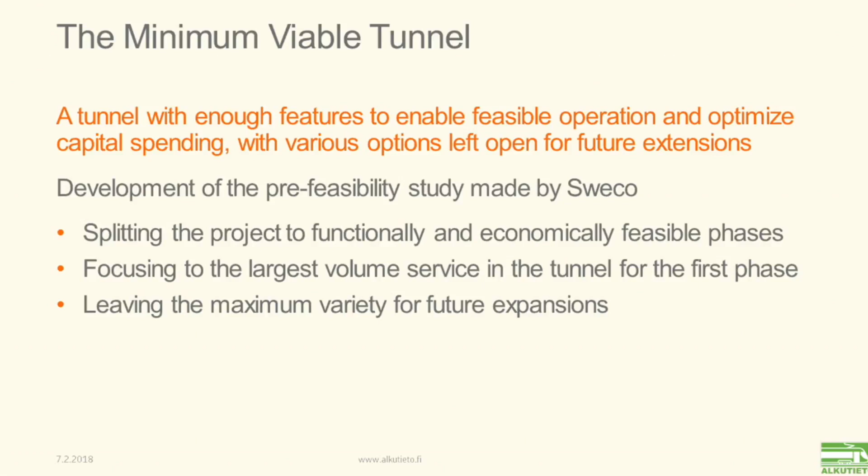And the work is very much based on the pre-feasibility study made by Sweco, because that was our background information given to us before the deadline of the competition works. We showed the final solutions and final results of the video in the morning, also only today. So that's not the background of our work.

We tried to split the project functionally and economically into feasible pieces, and we are focusing on the largest volume service for the tunnel, to be able to make it true in the beginning, and still leaving the maximum variety for future expansions, as I explained in the beginning.

So the primary target for this tunnel, when we look at the situation of the traffic systems both in Helsinki and Tallinn side, and the current situation of what happens between these two cities, the main purpose for the Helsinki-Tallinn tunnel is daily commuting, so that people who live in either of these two cities may go to work in the other one, the same way as many people around Helsinki area today live somewhere far, about 1 hour from Helsinki.

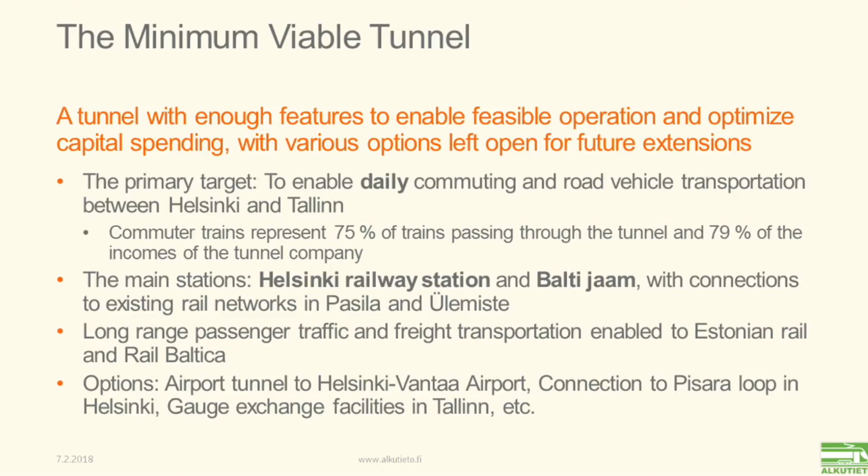They wake up in the morning at home, travel 1 hour by train to work, have a working day, then return back home every evening. Today this happens between Helsinki and Tallinn differently: someone who wakes up in the morning or perhaps the evening in Tallinn side travels 3 hours to the Helsinki area, spends the whole week in Helsinki, and returns home only Friday evening or Saturday morning, depending on what kind of work he has.

This will change, and this is the dramatic change, as this is also the background of the economy of building this tunnel. If this will not happen, the economy collapses.

Of course, there are other purposes for the tunnel also, but the thing is that this daily commuting is three-quarters of the use of the capacity and also of the incomes of the tunnel.

The other transport and other ideas which are included in the studies made of the tunnel are all valid in our idea also. So we can build artificial islands, and the purpose for those is primarily solving the waste problem of the tunnel rock.

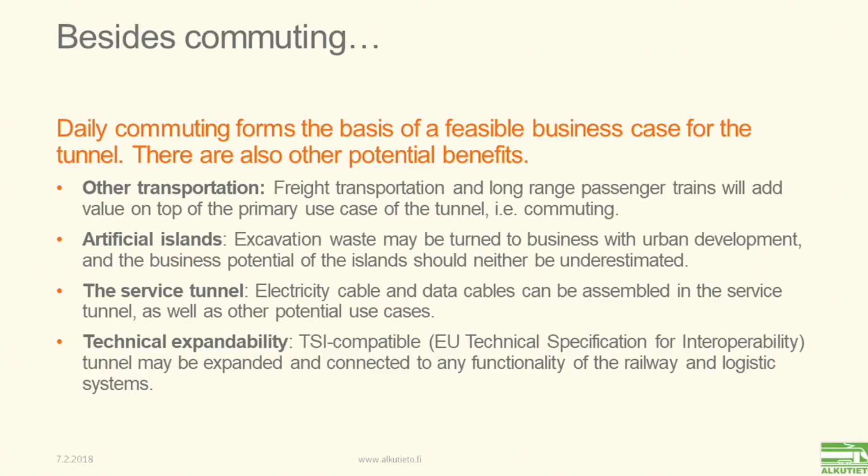We can also use the tunnel for other kinds of transportation than just daily commuting, because it's normally TSI compatible, which is technical specification for interoperability set by the European Union for railway systems in the EU. So the tunnel is compatible for all kinds of transport. It does not require special rolling stock or any other special features. It is just a simple, logical part of the railway network of the European Union here in the northern part of the EU.

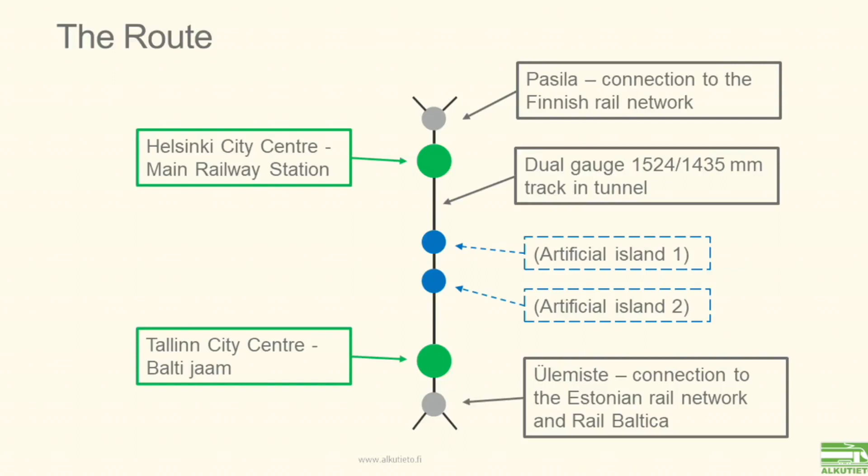This is the basic idea we have. What we think is worth building first is just the connection between Helsinki and Tallinn, building into the city centers of Helsinki and Tallinn, and then having a connection to the railway networks on both sides of the bay.

Our clear idea is that when we build a connection between two railway systems which have the old Russian gauge, the tunnel must be built having that Russian gauge also. It does not mean that it might not also include the European gauge.

We have experience of that already in Finland. Sweden has the normal gauge, and in northern Finland, between Haaparanta and Tornio, there is a bridge and track line which connects the Swedish and Finnish railway networks together, with dual gauge rails, and that's over 100 years old technology and solution already. So there's no question of whether it's possible or not.

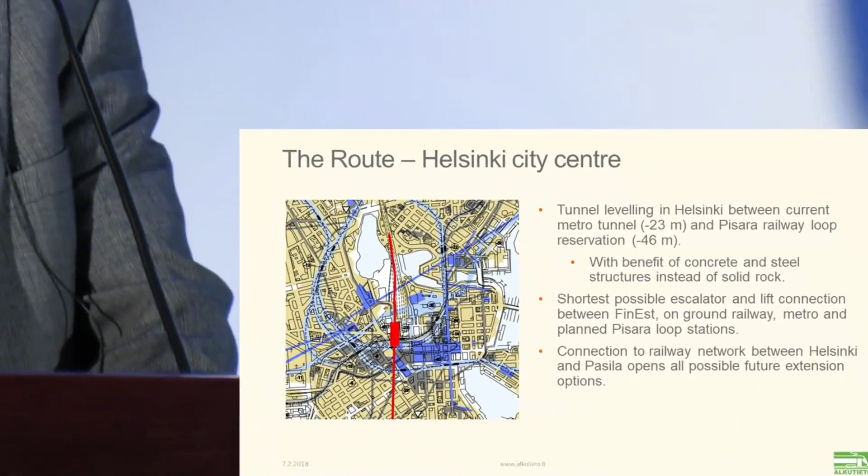What is important is that if we can make the daily commuting true, the stations must be in the core, in the heart of the public transport systems, both in Helsinki and in Tallinn. In Helsinki, that means the main railway station, which is the center of the public transport system. It has metro, tramways, railways, and the current commuter train network node there. So the station has to be in the middle of this point.

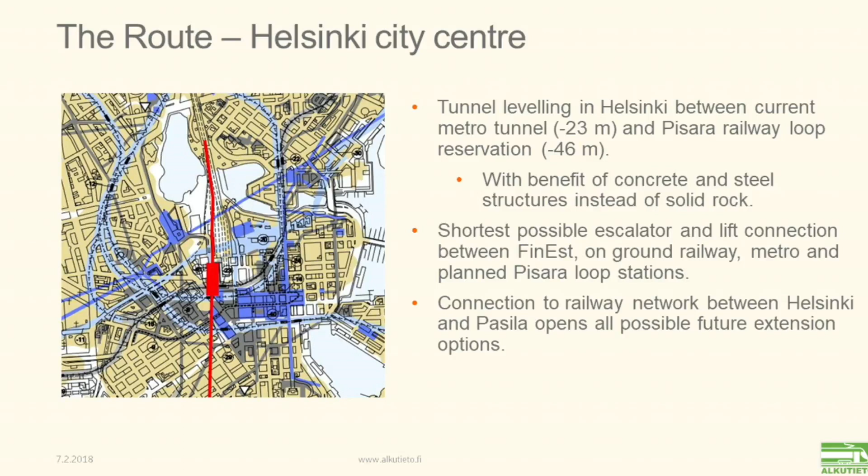It has to not be at a depth of 100 meters, because that makes 10 minutes more traveling time, just because downside traveling requires also time. So there is a solution: we can build it higher, and the background to build it higher is that we can also build bridges underground. So we do not need to have 10 meters of solid rock in between the two track levels if we build concrete bridges underground also. Actually, our metro network already has one place where such a situation appears.

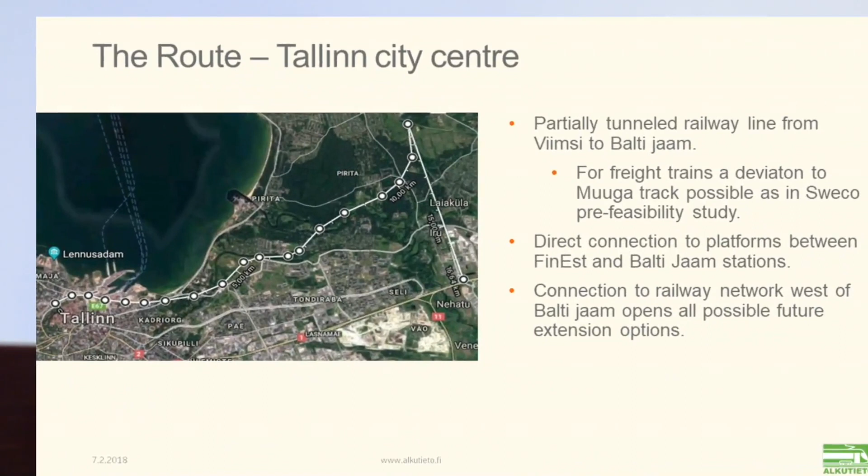It seems that the Tallinn end is much harder and more challenging because of the bay area sediment on the bottom of the sea, which makes it practically impossible to build a tunnel there. That's why the tunnel is planned to be built to the Viimsi Peninsula, so we need to build approximately 10 kilometers more in length.

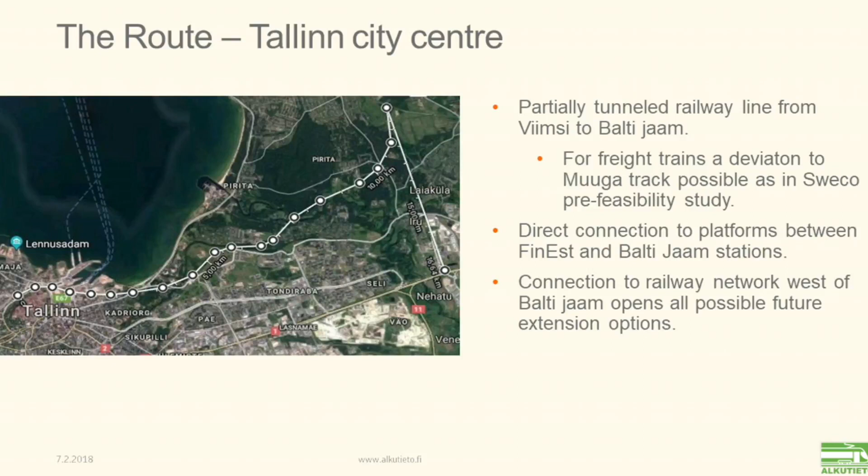This is needed to reach Balti Jaam, which is the heart of the public transport network in Tallinn. There may be some ideas to develop the Ülemiste area, but one simple comparison: if we are going to have trains every 10, 6, or 5 minutes carrying 1,200 passengers, a tram line cannot bring those passengers from Ülemiste to the city of Tallinn, because trams are smaller. So if we wish to have daily commuting, we need the connection to the public transport network hub in Tallinn, and also a connection from there to the Tallinn and Estonian track network.

Where do the passengers come from? Current statistics say there are some 20,000 Estonians commuting weekly from Tallinn to the Helsinki area. But if we think about the practical situation around Helsinki, we end up with different figures if daily commuting is possible, so people can go home for the evening to their families. Based on those statistics, the estimation for the number of passengers in the tunnel during the first years is from 36,000 commuters, which generates 72,000 trips per day, because morning one direction and evening back.

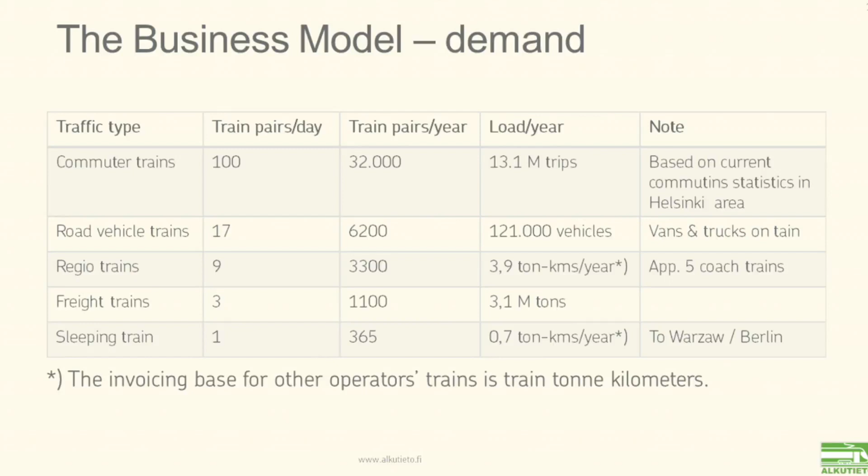There is no limit for increasing the number of other trains. The only critical thing is that the number of passenger trains in peak hours may become a challenge—there may be a situation where the capacity of commuting is not enough for the demand. That's simply based on the experience of commuting around the Helsinki area, and with this tunnel, Tallinn will become something like a part of the Greater Helsinki area. So why, in the long term, wouldn't people behave the same way here in Tallinn as they behave around Greater Helsinki?

What comes to the economy: what we have estimated is that the operating result of the tunnel company, or whatever the organization is, would be 210 million euros per year from the activities—commuter trains, road vehicle trains, and hiring the tunnel capacity for other operators than the trains the company operates itself. That is a reasonable ratio compared to the amount and size of the investment.

That's why we feel that doing the first thing, having the tunnel built for daily commuting, will guarantee the economy of the tunnel, and it doesn't close away any other ideas or expansions whatsoever they are. This requires some technical and logistical challenges, but they are all possible. It requires more clever engineering than just the simplest solution, but it's completely realistic. Plenty of ideas have been thought out and pre-designed, but not everything can be explained in this work—there isn't enough time for that.